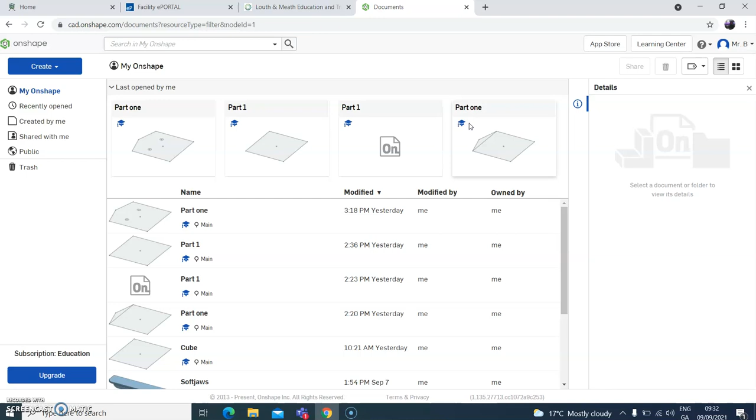So now this is what we're actually going to be drawing here in 3D. These Softjaws, they're 25 by 25 by 110 long. So first of all, we're going to draw this L shape here, and then we'll smart dimension it.

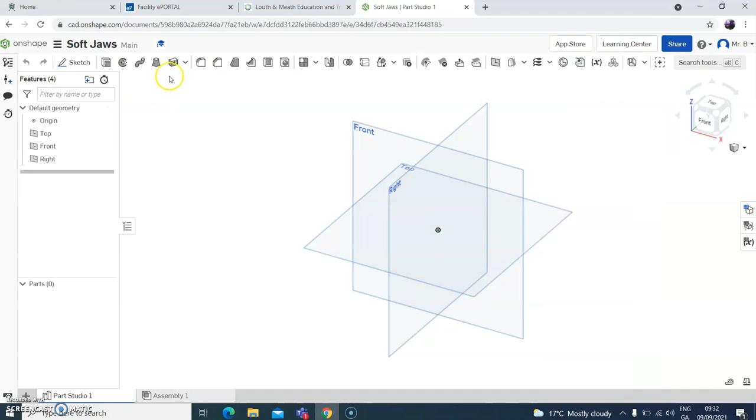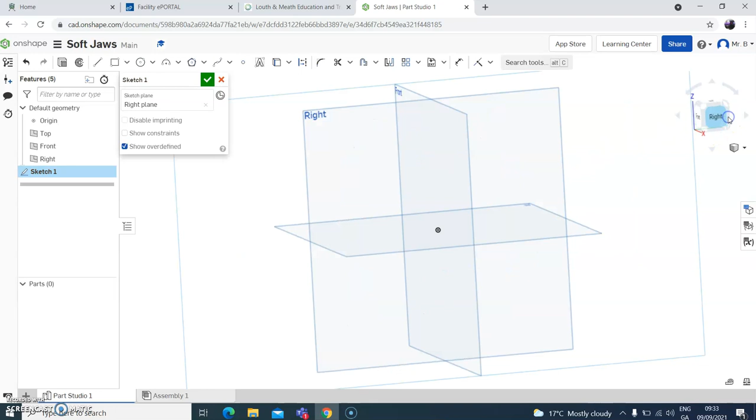So if we go up here to sketch, it'll ask us where do we want to sketch, and this time we're going to go on the right plane. As you highlight the different planes, they go orange, and the one we want then is the right plane. Wait till it goes orange and click on that. Next go over here, and if you click on this, it'll just go directly into that right plane.

What we want to draw is a line going into the center. It was orange. We're going to draw a line straight up, across, clicking on your mouse, left click again. See the way it goes, dashed lines - that's letting us know the line is straight across. Same here, make sure it's straight down to there. I want to find a line across to here.

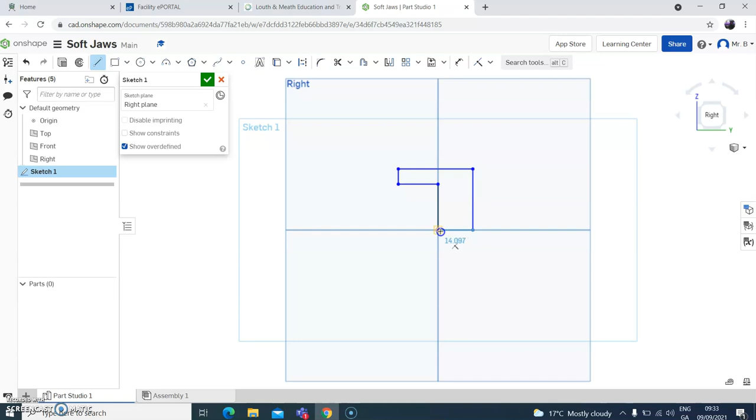So what we're going to do now is smart dimension it. Up here with dimension, we'll set this to be 25. If you click on the line, click up here, type in 25, push return, and this one here is the same, 25. What you need to do is hover over the line, click when it's orange, click on that, drag it out - 3 millimeters at the turn. So here, 3 millimeters at the turn. And that now is the shape that we want.

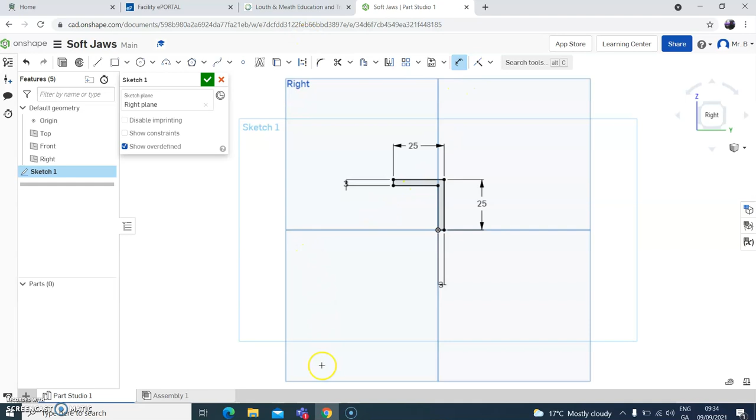This is our end view here now, 25 by 25, 3 millimeters wide. What we're going to do now is extrude it to make it 110 long.

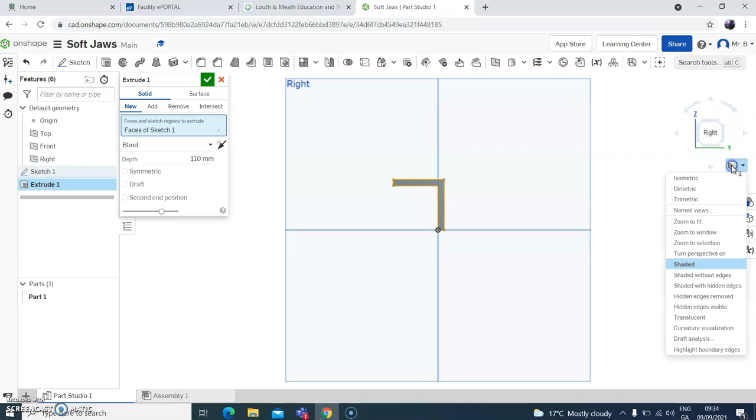So if we go up here towards this extrude, click on that, and as I said, we want to extrude 110, this distance here. So we type in here 110. And let's go up here, isometric - you'll see now we've got there now 110.

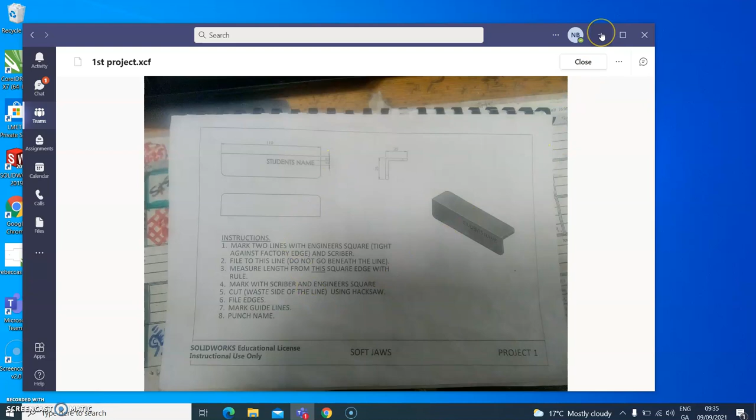The last bit we have to do now, the second last bit, is to curve these little edges here. These are known as fillets, and they are 10 radius fillets. So go up here and look around the top until you find fillet, click on that there, and we want this here.

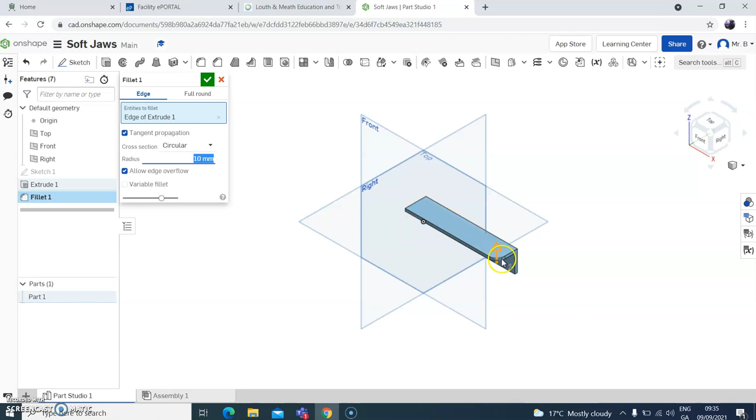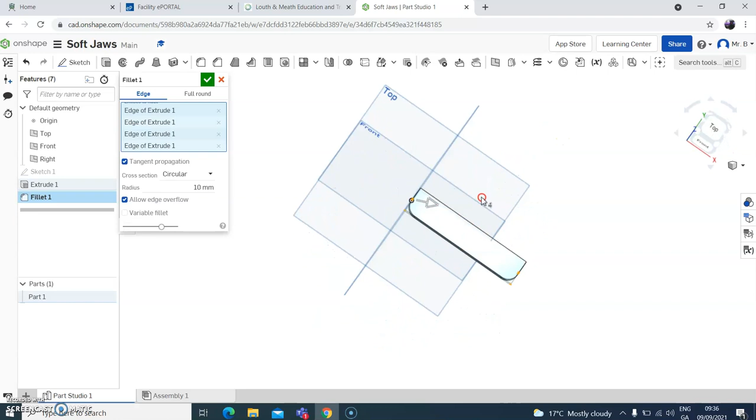We want to do this one. We want to do this one. And we want to do this one down here. And there's all our little fillets done on our name tag.

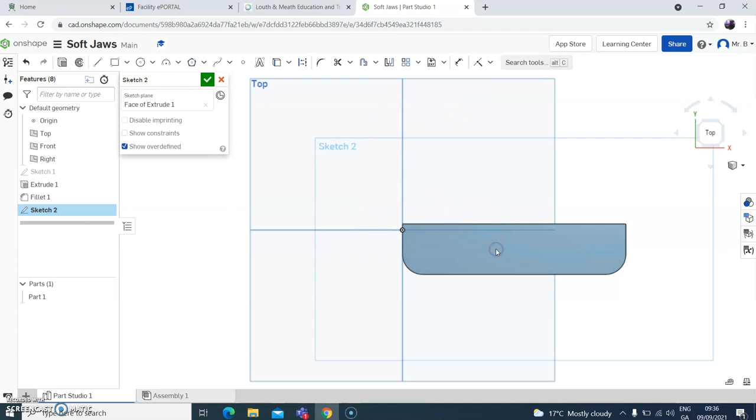The last thing we want to do now is look at the top and put a name on it. So what I'm going to do is go up here to sketch, sketch plane - it's asking us where do we want to draw it. I want to draw it right here. And look along the top to find text. We highlight anywhere along here, you get any size for now.